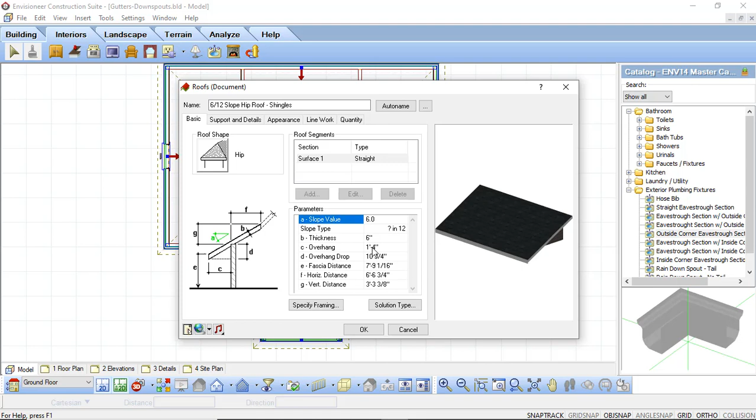I'm going to say OK, and now I'm just going to add in some gutters. So I'm going to go under my Interiors tab, then under Interiors select plumbing fixtures, and at the very bottom is Exterior Plumbing Fixtures. In here are a bunch of different options you can use for your gutters. We have a straight section eaves trough gutter, gutters with actual corners on the outsides, and inside and outside corner pieces as well.

I'm just going to select the straight section. I'm going to zoom in on this front part of our design here, and before I add this in, I'm going to specify the base height. The base height is going to be determined based on that fascia distance that we found earlier. Now that was 7 feet 9 and 1/16 inches.

I want this to be set so that it sits just a little bit below the edge of the roof, and since this gutter is actually inserted based off the top of the gutter, I need to offset it about the thickness of the gutter as well. So I'm going to make this 7 foot 4.5 inches. I want to make sure I have all of that information typed in, and then I simply press tab on my keyboard, and that will lock the gutter in at that height.

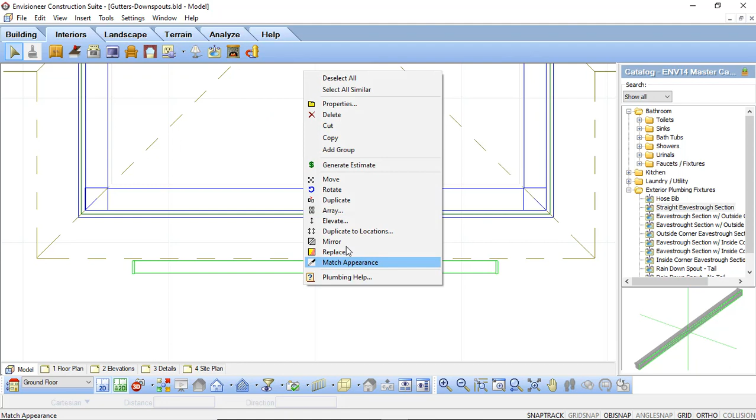And I can just left click to place it. Once it's added in, I can further move this around to snap it exactly where I want. I can use the arrow keys on my keyboard to nudge it, and I can right click and move it into place so it sits close to the face of that fascia board.

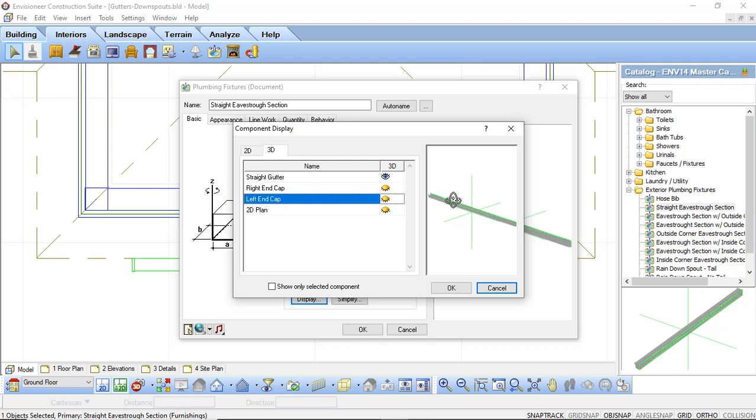Once it's in place, we can further refine this gutter. I can go into its actual properties and go into the display option, which will allow me to control what is actually going to be displayed in 3D. This particular section of gutter has a left and right end cap, but since this is going to be a middle section of gutter, I don't need those end caps on there. So I can simply turn them off, which will remove the end caps to allow my water to flow through. I can say OK and OK.

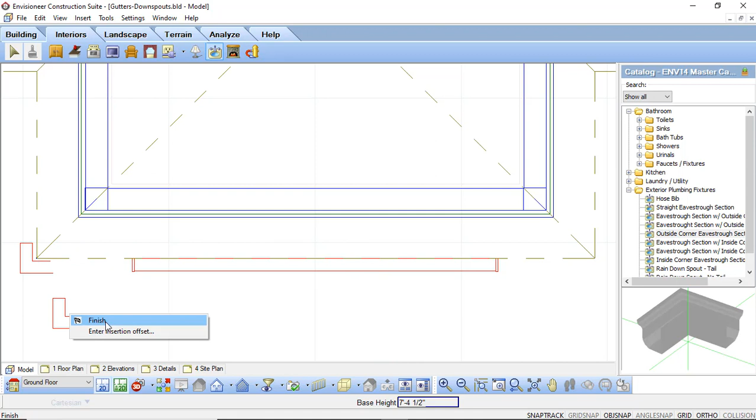I'm now going to add in an outside corner, making sure again this is set to 7 foot 4.5 inches, and pressing tab to lock that in. I'm going to move this into place and get as close as I can to the actual corners here, using my arrow keys, and I can further refine that by moving it in so it snaps to that edge.

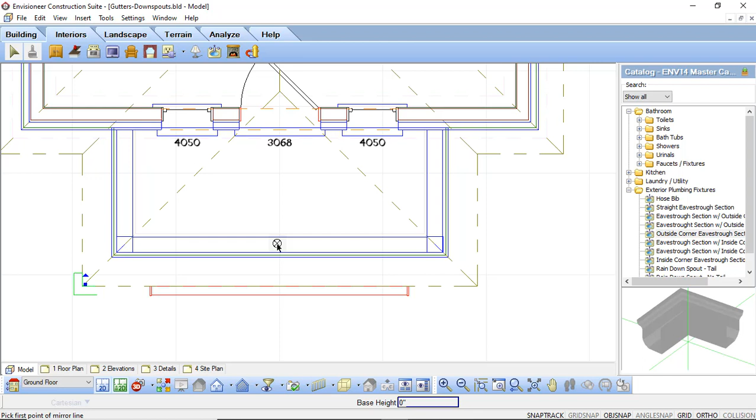This time, with that gutter selected, I'm going to right click and say mirror, and I can now mirror that around a known point. Since this is the center of that beam, I know that this will allow me to mirror along that point, and I can place it in. I don't want to delete the original, so I'm going to say no.

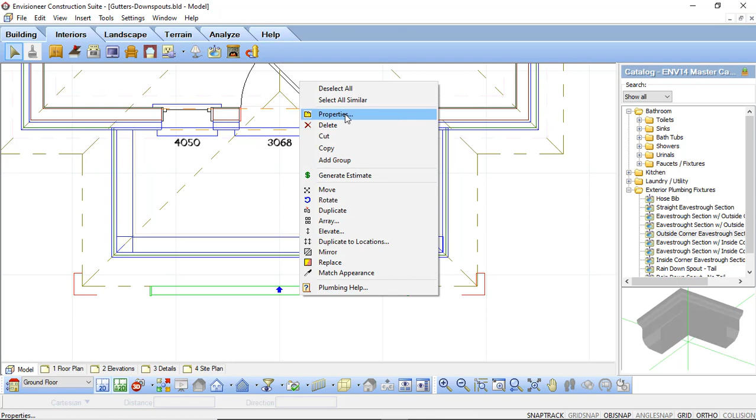I can now measure between these two gutters and determine that this needs to be about 14 foot 2 inches. So I'm going to select the gutter, right click, properties, and change the width to be 14 foot 2 inches. I can then say OK, and that will add that gutter in to fill in that void. If I look at that in our 3D view, we can see how that gutter is now sitting along our fascia board.

Another way to add in gutters is to use the member tool. We're going to go to the Building tab and select Members. Under Members, towards the bottom, you'll see a folder called Gutters, and in here we have 4 different types of gutters that are created using a profile. I'm going to double click on the triple cove gutter.

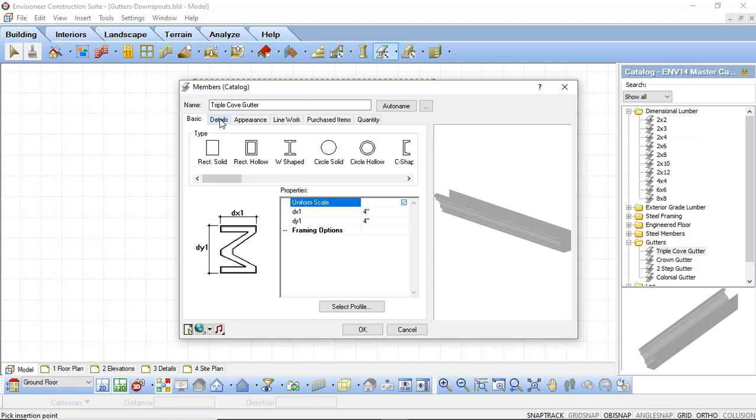I'm going to bring up its properties. There's some variables in here I want to take advantage of, so I'll go to the Details tab and make sure the end condition is set to miter. This way, whenever I come to a corner, it will automatically miter those edges for me. The other value I want to look at is this reference point, which is going to the actual top of that member. So when I go to add this in, I need to make sure that dimension is going to the top of the member itself.

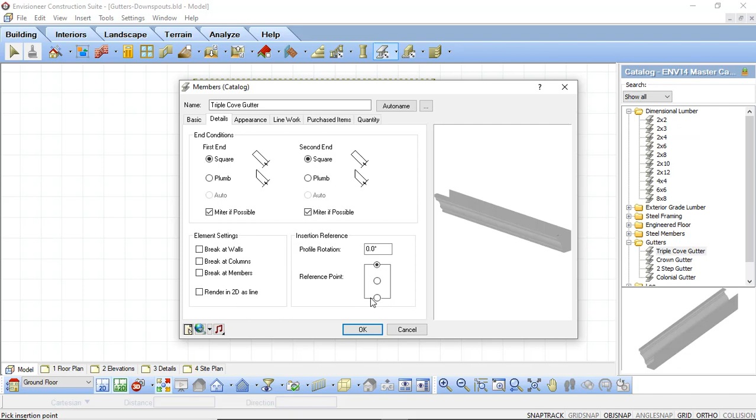So I'm going to say OK and start to add in this triple cove gutter. I'm going to take advantage of my base height and type in the value I need. If you remember, our main dimension was 7'9", so I'm going to make this 7 foot 8.5 inches. I'll just press tab, and now I'm going to start to draw in that gutter.

Now I'm going to get close to the roof, but not right up to the edge of it, because I don't want to snap to that, since it will snap to the center of the member. So I'm going to draw this in, get as close to the edges as I can, and just place them in.

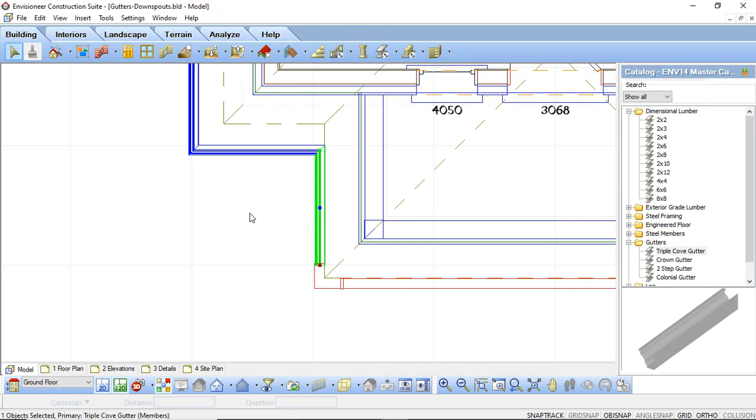And then I'm going to say finish. I can then select the edges of the gutter and move it in so that it sits up close to the fascia itself. I'm just going to move all of these gutters in so they sit close to the edge of the fascia board. As you can see, as I added them in, it automatically mitered those corners for me, so I can see how that corner is going to be created just by using that miter tool.

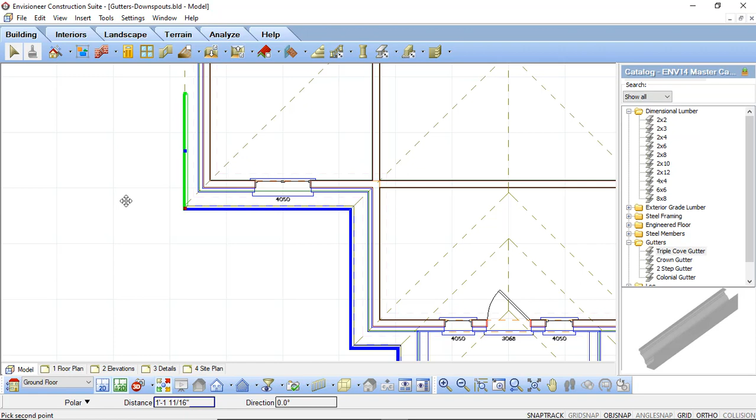We can now take a look at this in our 3D view, and we can see how this is going to look in regards to the rest of our design. So now we can see our gutters along the edge of the roof using the member tool.

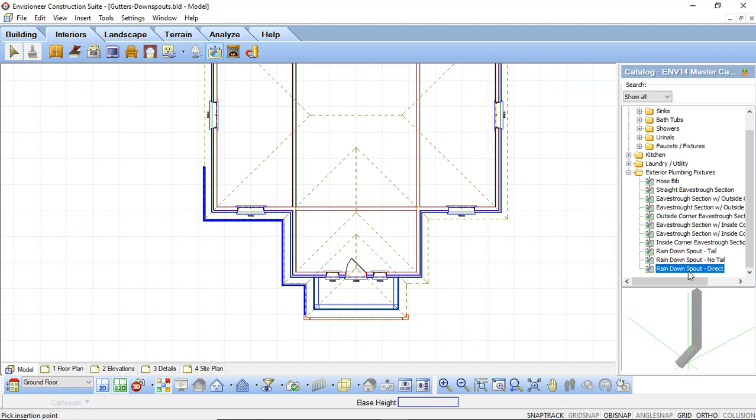Next, we're going to look at adding in a downspout. So I'm going to go back to Interiors and select Plumbing Fixtures, and under that exterior plumbing option is a rain spout with tail, and you can see how that looks in the preview. There's also just a rain downspout with no tail, and then just a direct tail option. We're going to use the downspout with tail.

I'm going to bring this into my drawing area and place it where I want it to go. Right now we're looking at the 2D plan view, and this is going to be the top portion of that downspout. So I'm placing this right up against the edge here, and then left click once to add it in. I'm going to go into a 3D view so we can see what we're working with, and you can see here that we need to not only elevate this, but we need to rotate it.

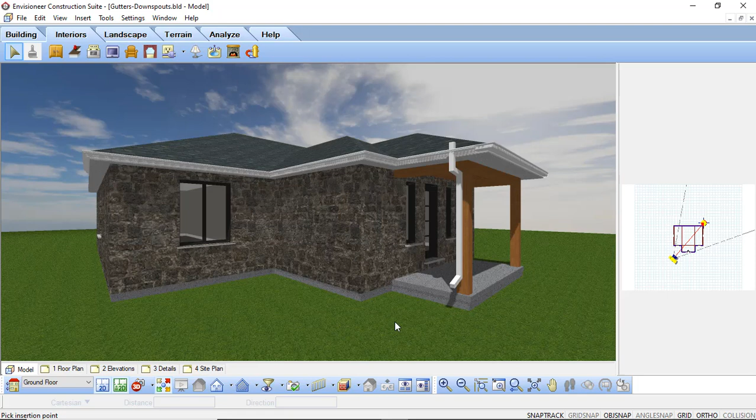So I'm going to go back into 2D. I'm going to select Edit, select Previous, and I'm just going to rotate this around, and now I'm going to move it into place by just using my arrow keys to get that close. I go into a 3D view, and again, now I can start to adjust the actual properties.

So if I right click Properties, I can now control how far back I want this to go, and we determine that that should be 1 foot 4 inches, and I can still leave that at 8 feet high, and I'm just going to say OK.

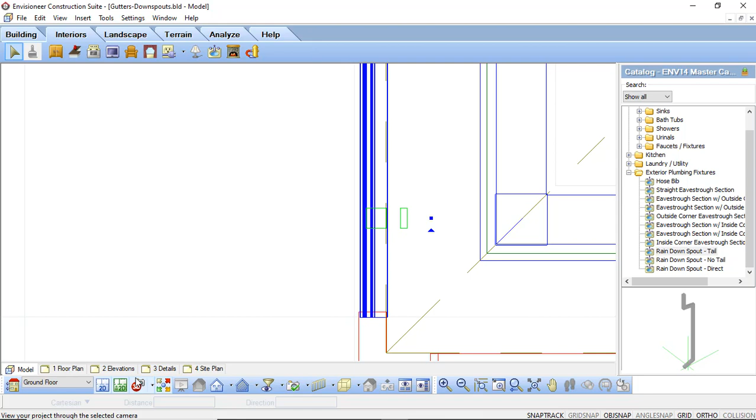I'm going to go back into 2D, and again I'm going to just move this into place because I want this to sit flush up against that fascia board. I'm going to go back into 3D, and now I can elevate this into place. I want this to be -4 inches. We can say apply and OK, and we can now see how that gutter is going to sit up against our post on our front porch.